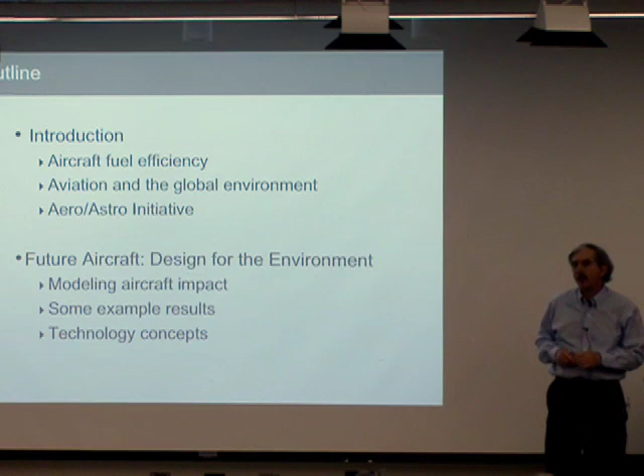That's a high-level overview. Then I want to talk a little bit about some of the technical work that's going on, discussing future aircraft and the possibilities for the next 20, 30, 50 years in terms of designing airplanes for minimum environmental impact, which requires modeling that impact, looking at what we get when we do that, and then talking about some of the new technology concepts that are particularly promising.

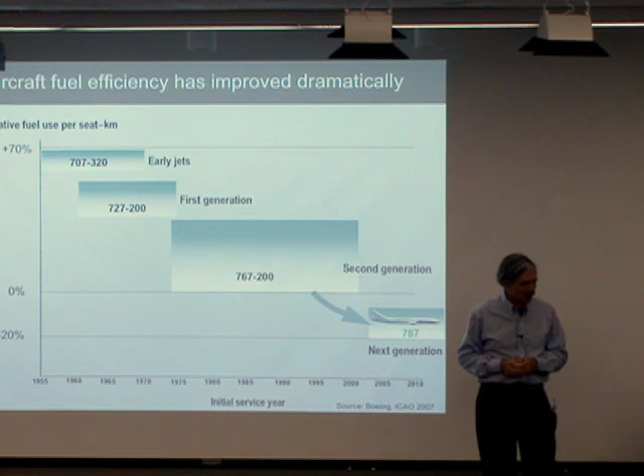This is a plot that the air transportation industry likes to show dealing with aircraft fuel efficiency. And they like to show this because it's a tremendous success story in many ways. Back in the 1950s, the first jets here used a great deal of fuel. This is a plot versus year, actually initial service year, of the relative fuel use per seat kilometer, per number of seats times the distance flown. So it's like miles per gallon divided by passengers, right?

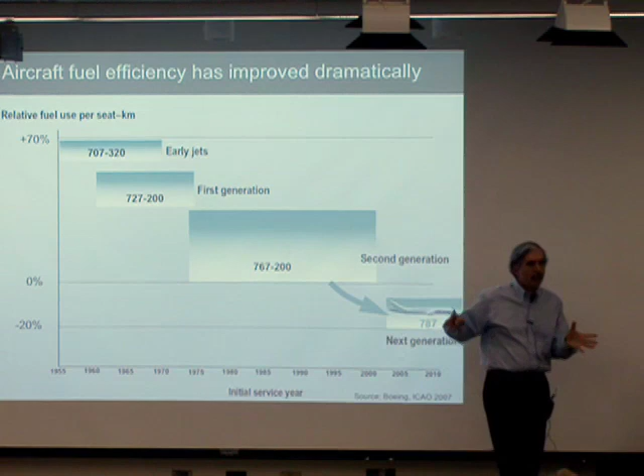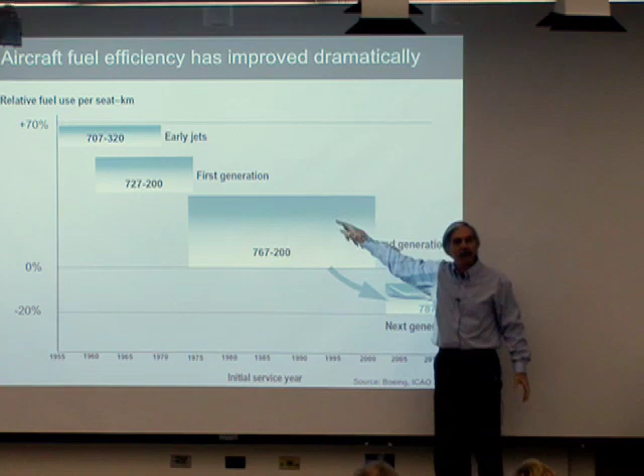But current airplanes use something on the order of 70% less fuel than the very first jets. It's a tremendous advance. I have to say this is partly because the first jets were so bad. And if you actually compare these two, it's still 50, 60%. So it's still really, honestly, a real success story in terms of the efficiency of aircraft.

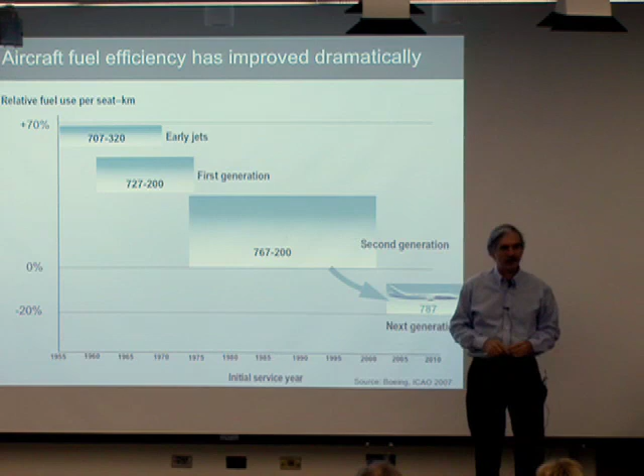The next generation of airplanes, 787, A350, et cetera, look to save another 20% or so over today's fleet. And one of the troubles with this is that people cite improvements in efficiency of somewhere between 1% and 2% per year. Clearly, if we've gone 50% or more over the first 50 years, we're not going to do another 50% in engine efficiency over the next 50 years. Can't do more than 100% efficient on engine technology. So what that means is that it gets harder and harder to make improvements, and this is one thing we're going to be talking about.

We're going to be talking about commercial air transportation, not private airplanes or personal air vehicles, because commercial air transportation has the biggest effect on the environment. So that's a great story.

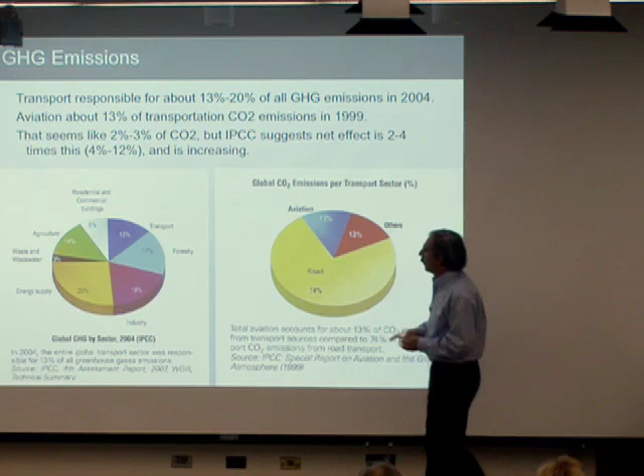But transportation's contribution to greenhouse gases here in 2004 is about 13% of the total. This is human-generated carbon emissions. Actually, this is greenhouse gases. This is CO2 emissions. Aviation is about 13% of that. Okay, so it sounds like 2 to 3% of carbon emissions are associated with air transportation. However, it's a more complicated story than that. And as you'll see, the impact of aviation is actually dramatically larger than that, and in the future, dramatically larger yet.

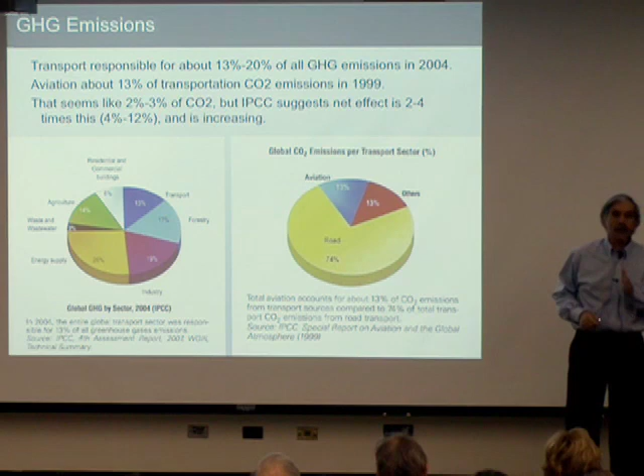What's going on is that the engines are burning kerosene, conventional petroleum-based fuels. In fact, the transportation sector uses by far the most petroleum fuels of any sector in the energy consumption. But airplanes burn kerosene-like fuels and emit carbon dioxide, just like everything else that burns hydrocarbon fuels.

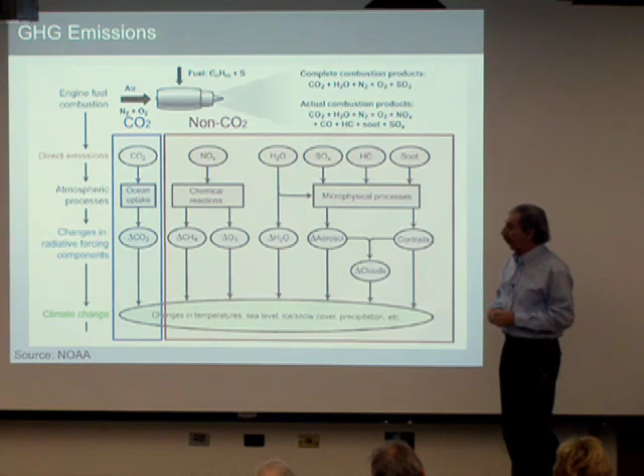Interestingly enough, because it's soaking in oxygen from the atmosphere, for every kilogram of fuel you burn on an airplane, you put in 3 kilograms of carbon dioxide. This is true of all kinds of hydrocarbon combustion systems, right? So you think about that, that 29 gallons, which is something like 30 times 6, 200 some pounds of fuel that you burned on that one very efficient trip across the country, still creates 3 times that. We're starting to get a good fraction of a ton in carbon dioxide.

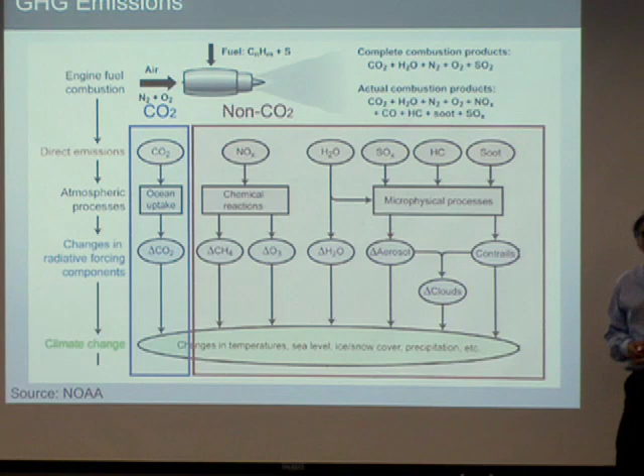One of the troubles is that in addition to carbon dioxide emissions here, airplanes, like many other things that burn hydrocarbons, produce nitrogen oxides, water vapor, sulfur oxides, unburned hydrocarbons, soot, and things that you wouldn't think are problems, like it's just producing water vapor, turn out to be problems when you deposit them at 40,000 feet. And so we'll look at that a little bit. But we have to look then at both the carbon emissions as well as the non-carbon emissions and its net effect on the environment.

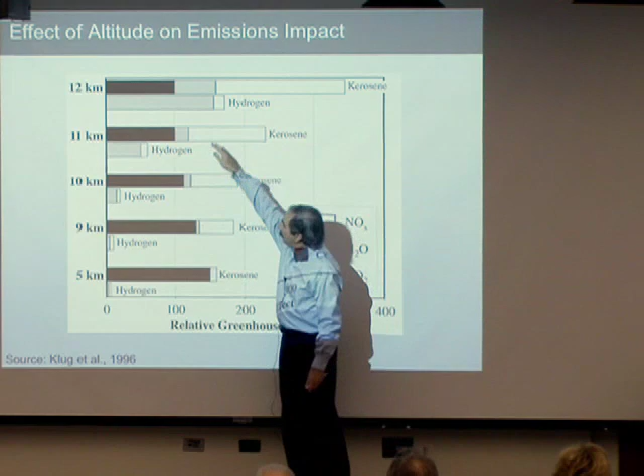One of the reasons that it's not just a story of CO2 is indeed that there are these other species, but also that the altitude effect is quite important. This is a plot from a study of hydrogen-powered airplanes. And what you see here is the relative climate effect for NOx, water vapor, and carbon dioxide at different altitudes, ranging from 5 kilometers up to 12 kilometers. Airplanes are operating usually in this upper region.

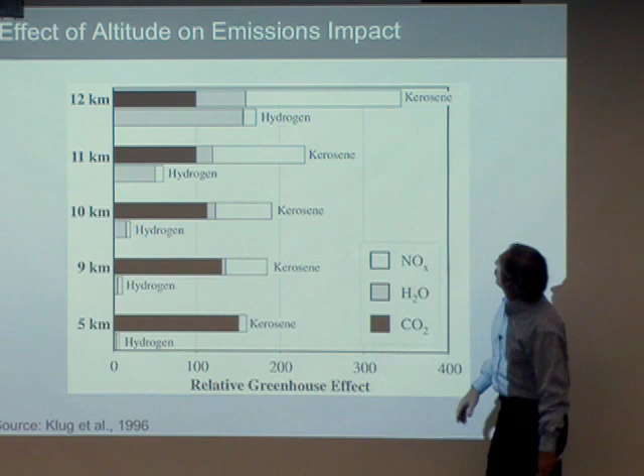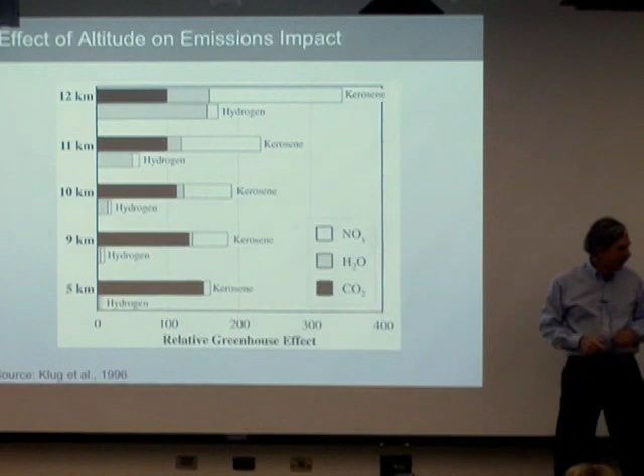What you see is that at low altitudes, the effect of hydrogen is very small if we were burning hydrogen. But at 12 kilometers, in fact, even hydrogen burning has a similar impact to burning kerosene at low altitudes. Kerosene here is substantially greater than hydrogen, but the contribution of different species to climate change really does depend a great deal on altitude. So that makes the analysis of this a little bit difficult.

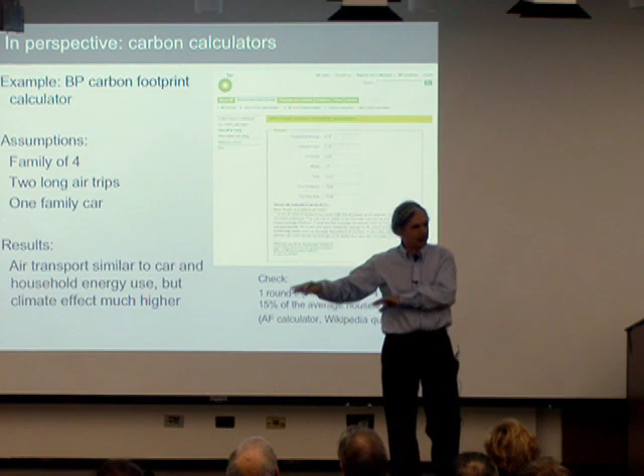What all this means, you could go online. This is a carbon footprint calculator from BP. Air France has another one of these. Most of the airlines have them now so that you can go and figure out just how much your flight is going to contribute in carbon dioxide, and you can then pay a company to offset these or just feel bad or something.

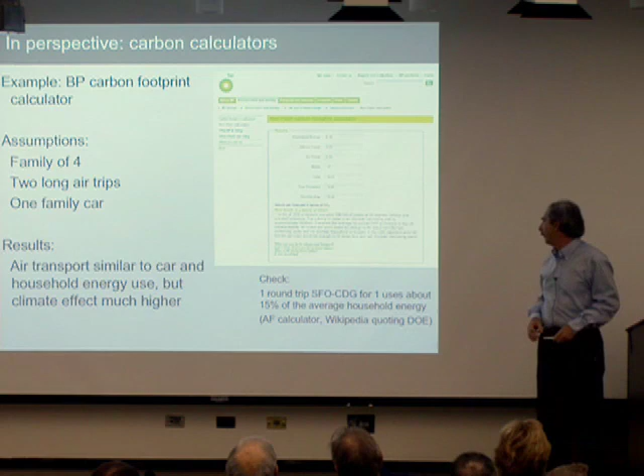But here's what this means. If you assume that you have a family of 4, take 2 long-distance trips a year, have 1 family car, you find that the amount of carbon emissions associated with air transport is similar to the entire year's household energy use, similar to all of the use of the car. The climate effect can be quite a bit higher. So another number here, fly to Paris from San Francisco for 1, that's about 15% of the average household energy use, 1 trip. So it is one thing that we do that has a big effect on greenhouse gas production and climate change.

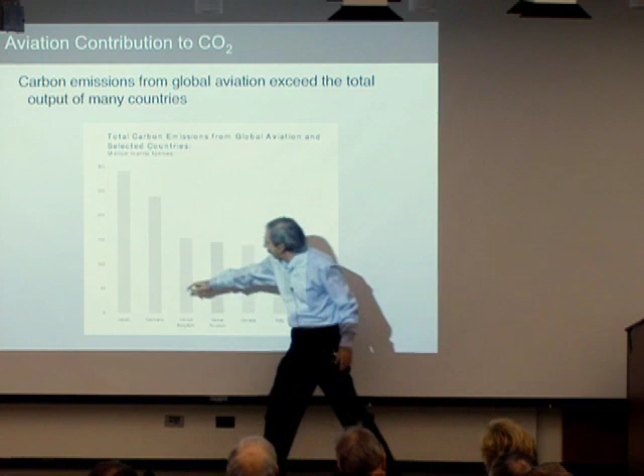What this means, by the way, this is a plot of the carbon emissions from global aviation and several countries. So aviation produces about the same amount of carbon here as the entire UK or Canada, for example. Here's Japan, Germany, right? So although we're talking about 2% contribution, it's a significant thing, and we have to think about it, especially if we're in the business of building airplanes.

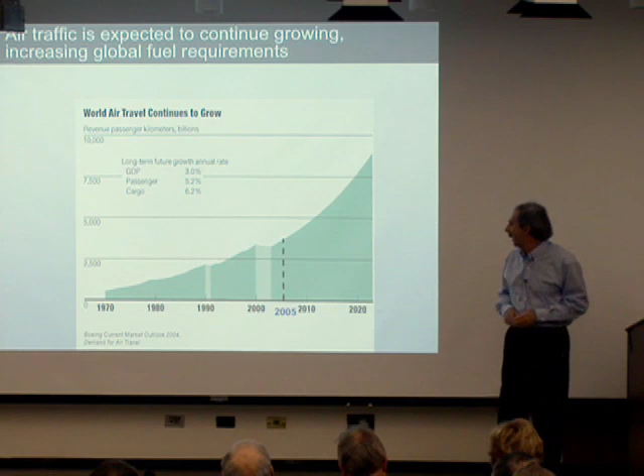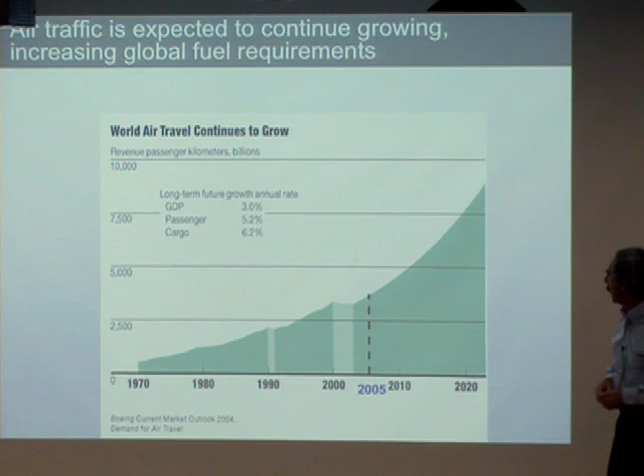It's actually far worse than that, and the reason it's far worse than that is because air travel is growing tremendously. It has for many, many years, even with dips associated with 2001 events. We are now actually still on this track. No one, of course, can predict this, and especially with global economy changes, we don't know this will happen, but historically, there's been a very significant, something on the order of 5 to 6% growth. In Asia, it's more than that. And so if you extrapolate, it doesn't take too long until you're talking about doubling and tripling the number of those passenger kilometers that are flown every year.

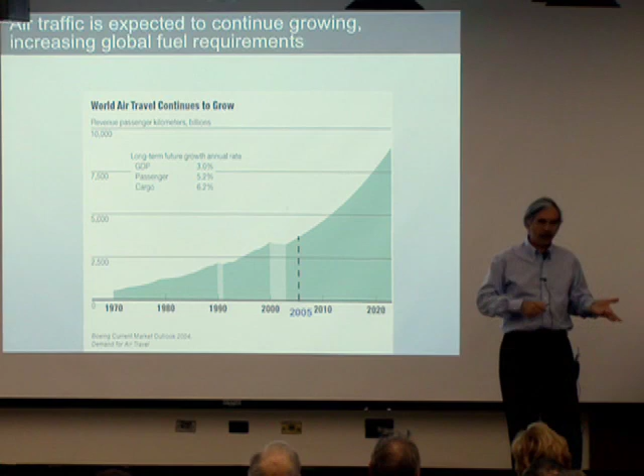And that means the total contribution is going up no matter what you do, or you have to do a lot to make it not go up a lot. So this has led to people being very concerned with the impact of global aviation. This is a thing from CNN that, among other things, says, aviation, the fastest growing source of greenhouse gases.

That's surely not true, and doesn't really mean much, but with radiative forcing factored in, aviation represents 12 to 13% of emissions. Well, that's also a lot of things that are a little bit tricky in looking at statistics, but the point here is that people are becoming aware of the impact of aviation on the environment and becoming concerned

about it. Yes? By emissions, are they referring to total greenhouse gas warming effect? Who knows what they are referring to. We'll see some numbers here in a minute so you can get an idea of what we really think that is.

So the problem here is that if you really anticipate a threefold increase in global air travel over the next few decades, we're going to have many problems. And one of them is certainly going to be the environmental impact. There are also going to be issues with safety and capacity and many other things. And so we are very concerned about all of these things and being able to maintain the ability to travel as we do now.

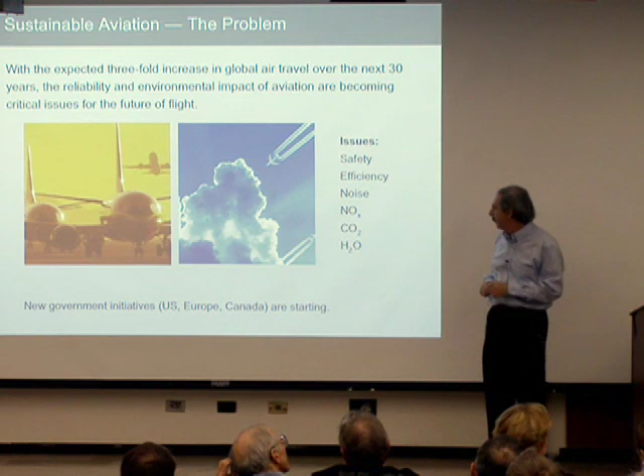This has led to a number of new initiatives at the government level. Both US, the FAA is doing things, NASA is doing things. In Europe, there's a Clean Skies initiative, which is putting in something on the order of $2 billion over the next 7 years to address exactly these issues. So these are just starting up,

and one of the initiatives that's starting up is some work in the Aeroastro department with the goal of developing technologies that will allow us to accommodate this growth and allow the tripling of capacity without an enormous increase in environmental impact. So what we'd like to do is allow a tripling of capacity with an actual reduction in environmental impact.

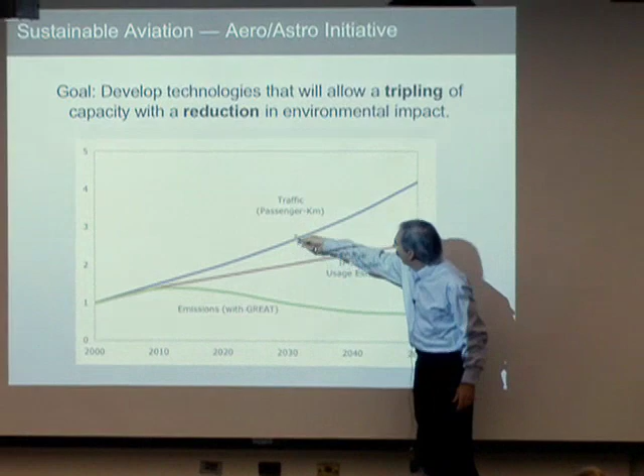So this is a plot of the expected traffic, the fuel usage, assuming a certain amount of improvement in aircraft, and what we'd like to do to have the emissions level off here so that in 2030, 2040, we are not doing any worse than we are now. This is what we mean by sustainable aviation. We'd like to be able to continue adapting to world growth without making a situation where we simply can't sustain that environmentally.

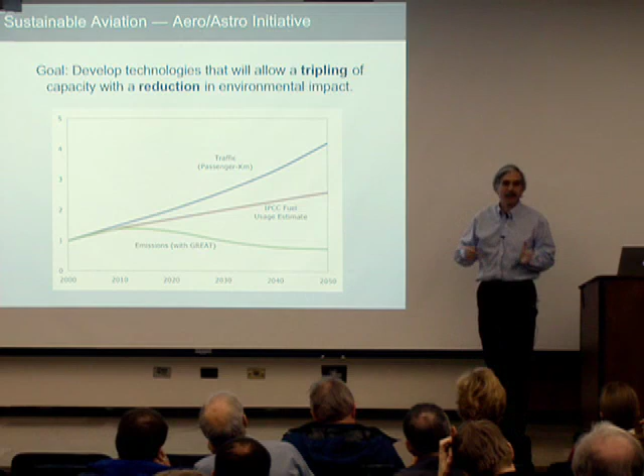This particular initiative involves a variety of research thrusts. One of them looking at new concepts and technologies that can help achieve this, and that's really what I'm going to be talking about today. But in AeroAstro, we also have folks working on airspace systems, how you deal with the complex system of aircraft in the airspace, and also monitoring the system at a larger scale.

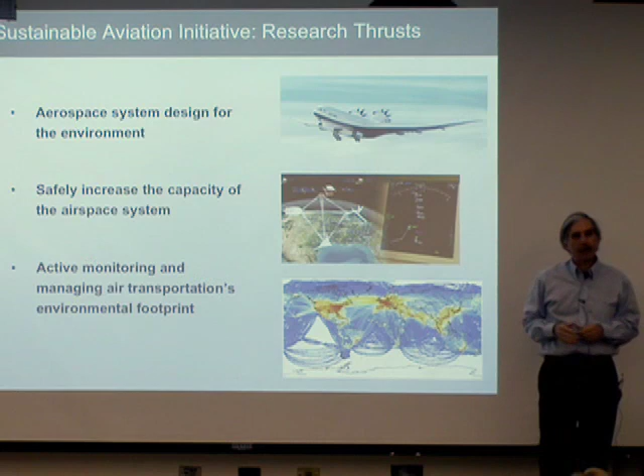So one of the research thrusts that I won't say much about has to do with actively monitoring and managing the system, and in particular the environmental footprint, so that you can control the operations to reduce the impact. One example of this might be real-time monitoring of winds and conditions around an airport to try to reduce the noise footprint. Another might be to actively monitor the conditions in the atmosphere that cause contrails.

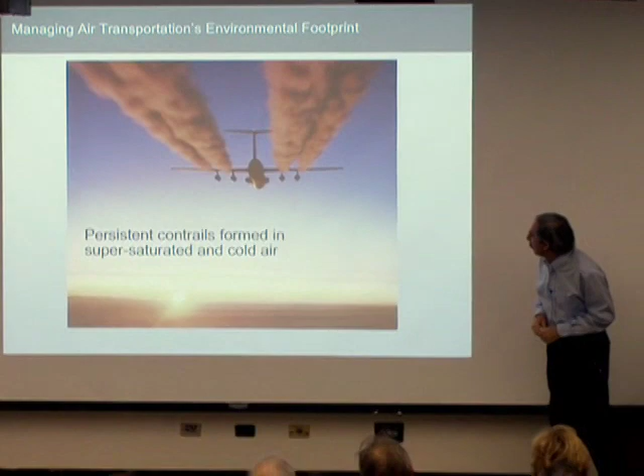By actively monitoring, I mean using satellites and a variety of inputs so that you can tell an airplane in real time, look, there's an area that's going to cause contrail formation, replan your route, change altitude, do something, because contrails, as we'll see, have the potential of causing climate change as well as along with the CO2 emissions.

And here you see contrails formed in the supersaturated air. But the conditions for contrail formation are actually pretty specific. That is, you change the altitude by a few thousand feet and you won't produce contrails. So knowing that that's going on, we can make a big difference.

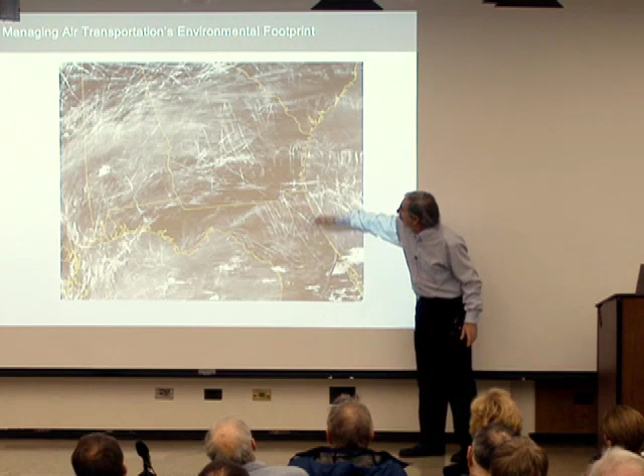And here you see some contrails. This is Florida, right? So this is southeastern US. A fair fraction of that area is covered by contrails, and this has an effect on the balance of radiation from the sun and emissions from the Earth.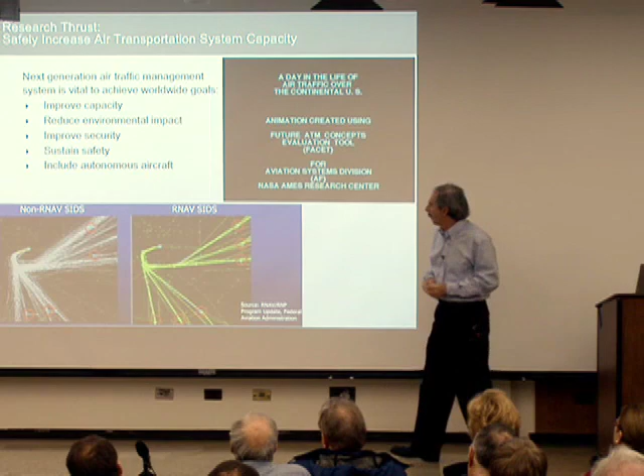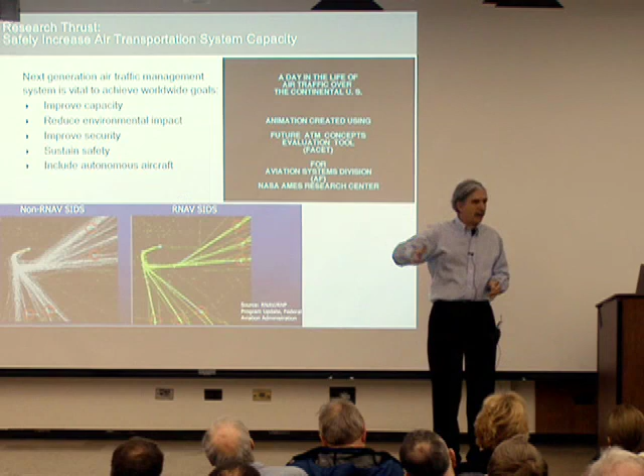We would also like to be able to use things such as precision navigation to reduce the environmental footprint. This is a plot of the tracks of airplanes departing from Atlanta. And this is a plot of what could be done, and this is an actual demonstration, what could be done using precision navigation systems and GPS to not just say, okay, turn right now, but rather to follow a path that's pre-planned, a four-dimensional path.

And you can see that the tracks of the airplanes are much more restrictive, and therefore the noise impact on the community is much reduced.

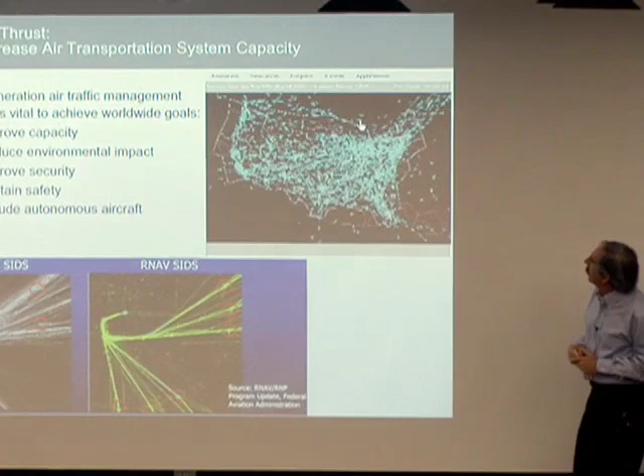We'd like to use these technologies to improve capacity, reduce environmental impact, and increase safety. To get a feeling for really what we're talking about here, here is a movie of actual positions of airplanes over the US in a day. We're looking now at 1,700 airplanes.

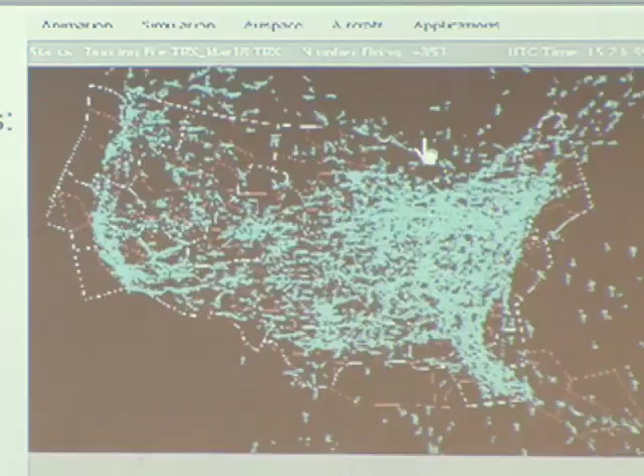Now it's the middle of the night, so things get pretty quiet. And then you'll see as the sun starts rising in the east, we start getting more traffic in the east. And then as it moves west, we now have 4,000 airplanes flying. And this is a real challenge to try to manage in any reasonable way. Certainly, there are opportunities there to do more than we're doing now.

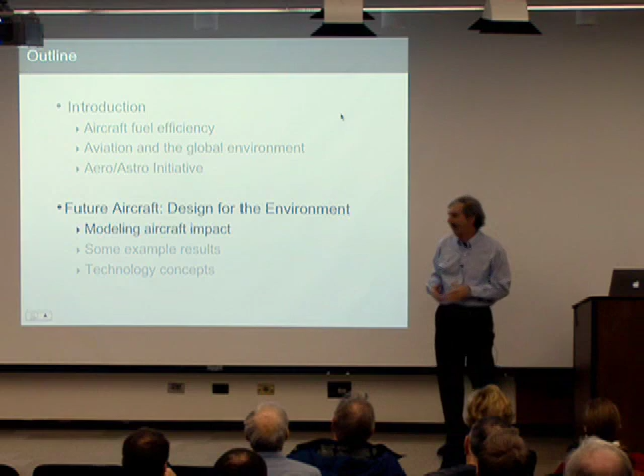So let me say a little bit about what we envision doing in the future, looking at aircraft technologies where we design the airplanes not to just minimize cost, but to look at their impact on the environment. I'm going to talk about three things: how we model that impact on the environment, show you some results, and talk about some new ideas.

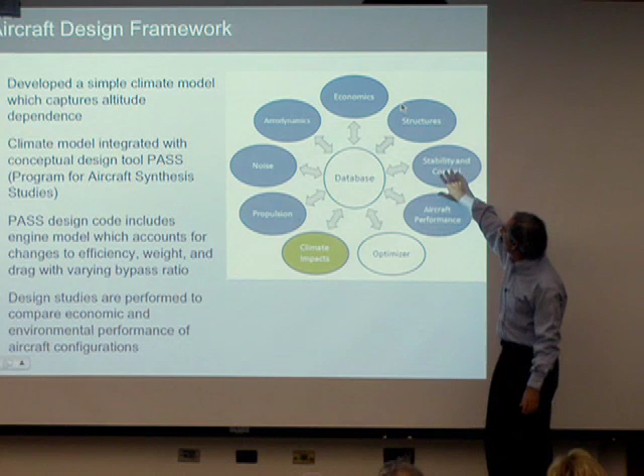So at Stanford, we developed methods for designing airplanes and evaluating them that include not only their performance and stability and control, structures models, economic models, noise models, propulsion, all that communicate with the database. This is a complex multidisciplinary design problem. We use numerical optimization to vary all kinds of parameters about how the airplanes fly or what they look like, and then come up with, in some sense, the best design subject to whatever constraints that we've imposed.

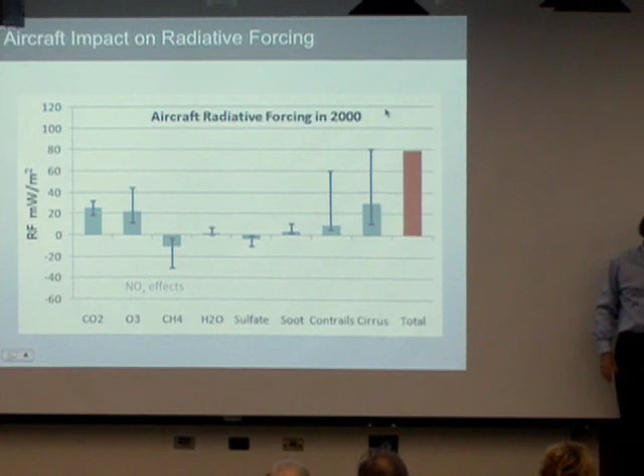One of the things that we've done with this analysis tool that we also use in classes here is to develop improved models for climate impact and to include that in the entire aircraft design process, right from the very beginning. That is not so easy because there's a lot going on. This is a simplified version of a famous chart from the IPCC, the Intergovernmental Panel on Climate Change, that looked at the aviation impacts on the environment.

And what you're seeing here is the so-called radiative forcing. It's the imbalance in energy flux or power flux between sunlight and reflected and other fluxes. And what we see here is the delta due to aviation actually over the history of aviation. And so what you see here is CO2 producing a net radiative forcing that's shown by the height of this bar, with this being an uncertainty in the estimate.

Here you see ozone and methane, which are affected by the presence of NOx, nitrogen oxides. Nitrogen oxides tend to deplete methane, but create ozone. And the extent to which they do this depends on lots of things. Water vapor, sulfates, soot, contrails, cirrus clouds. What you notice here in the contrails and cirrus clouds is that the effect is not trivial, but the uncertainty is huge. And so we have to think about what that means. So here's the total radiative forcing.

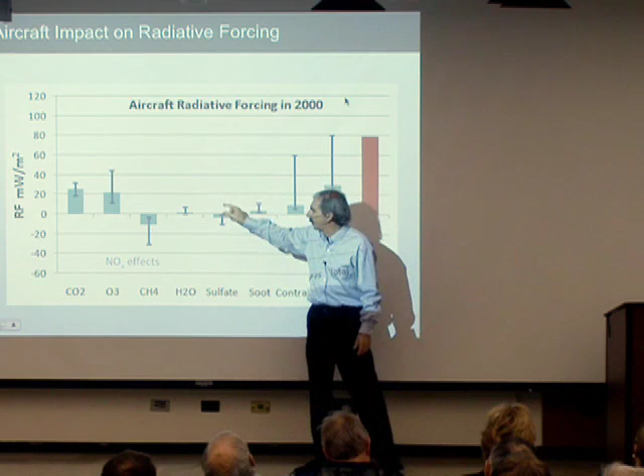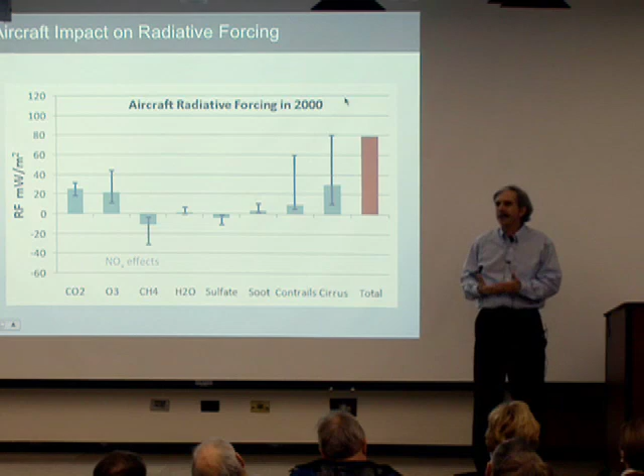So if we're going to develop a climate model for airplanes, we have to look at the effect of many of these things. We're going to ignore a few of these small ones, but many of these things whose impact is actually pretty hard to figure out, because radiative forcing is a pretty bad measure of climate impact. Just as an example, CO2 can stay around in the atmosphere for 50 to 100 years, whereas contrails disappear in a day or less. And so to properly include these in some kind of model is a challenge.

So radiative forcing has some difficulties. The effects differ due to different time scales. Different sources produce different surface temperature changes. It's not a great model. We're going to use something else that's a little more sophisticated that is going to be used just for our purposes. Let me show you what that is.

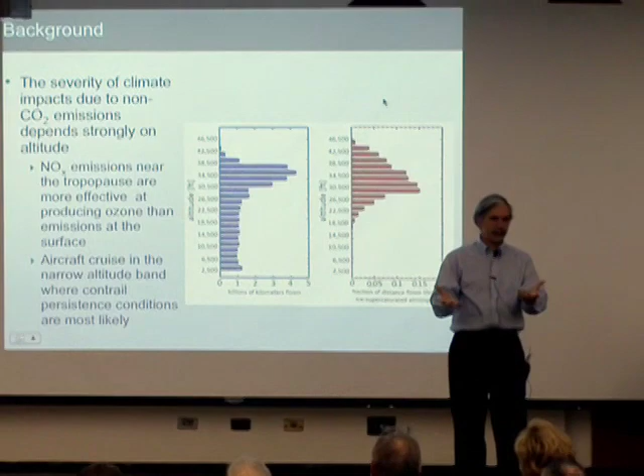We are going to use some kind of estimate of temperature change over a 100-year period due to the presence of these emissions deposited at different altitudes that you see here. It's particularly challenging because the non-CO2 emissions are very altitude dependent. This is the effect of NOx emissions and CO2 emissions, NOx emissions and contrails, which vary quite a bit with altitude. We are not trying to estimate exactly how many degrees change we expect in 100 years due to this, fortunately. We are not, like some other people, challenged with the task of trying to make policy based on this.

So we really only are going to be using this to compare different airplanes. And so we don't really care what the exact numbers are, but we want the effects of the different species and the different airplane parameters to be captured properly.

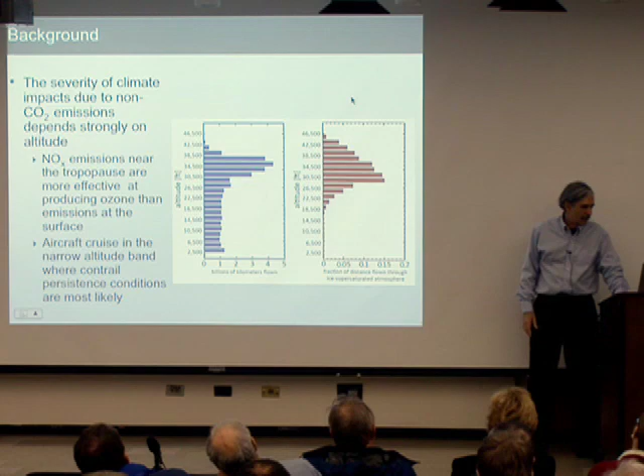So we're looking at contrail formation, NOx effects on ozone and methane. And we take the emissions, we estimate the radiative forcing. In this step, we are able to account for the time variation of short-lived emissions. These are based on climate models from real atmospheric scientists, not airplane designers. And we've developed a simple version that measures this change in temperature associated with a 100-year operation of this system over the time.

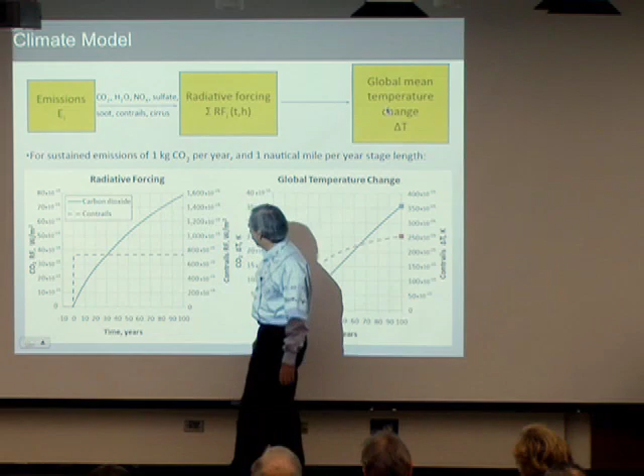This just shows some example results of, this is the CO2 radiative forcing. This is the radiative forcing due to contrails, and this is the time dependence of both of these. Actually, this is carbon dioxide in blue, contrails in the dotted line, and here we're looking at radiative forcing versus the new metric, a global temperature change.

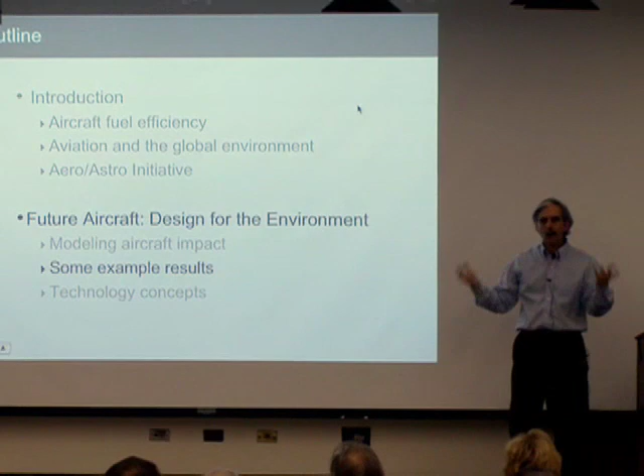And you could see their time dependence is quite different, and therefore you end up with different conclusions. So let's take a look at what some of those conclusions might be. We'll take a look at applying this model, doing optimization for future aircraft designs, and seeing what we get.

So here's the problem. We're going to design a 162-passenger airplane. This is roughly in the class of airplanes that people are interested in right now, which is going to replace the vast majority of airplanes flying. It's going to fly 3,000 miles, and it's going to look a little bit like a narrow-body airplane, like a 757 or a 737.

Not going to be some big, yeah. Jeff doesn't like flying in 757s. Neither do I. So we have something for you in just a minute.

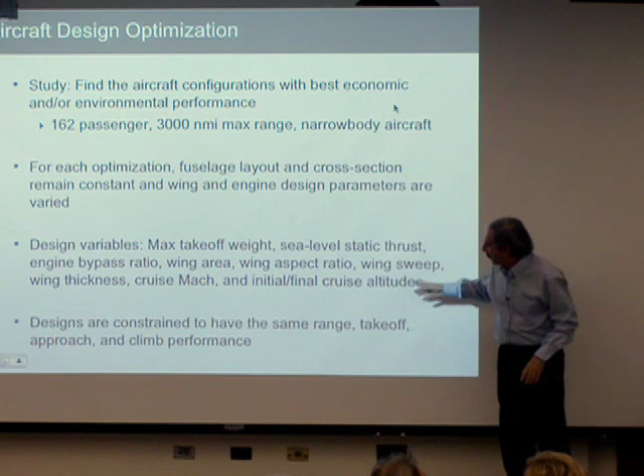We're going to fix the fuselage. We're just going to say we're going to keep the passengers just as uncomfortable as they are today, but we're going to reduce their guilt, so their environmental impact. We're going to change lots of things and constrain the airplane. So we have 10 design variables, like the size of the wing and what the span of the wing is, how fast the airplane flies and at what altitude, how big the engines are, this sort of thing.

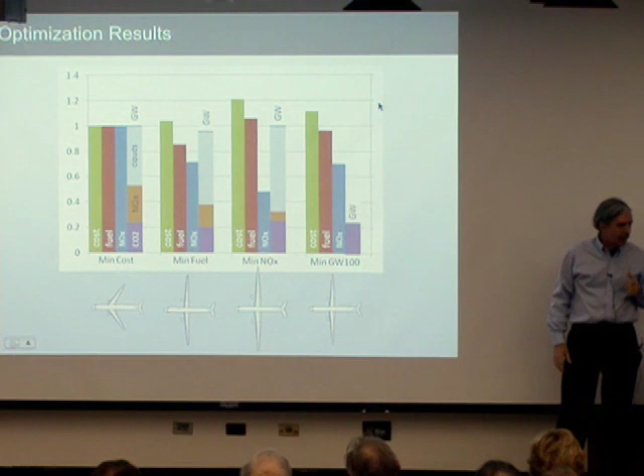We're going to make sure all these airplanes take off and land on the same runways, are stable, and fly the same distance. We are going to look at the difference between these airplanes if we try to minimize cost, minimize fuel burn, minimize NOx emissions, or minimize the complete 100-year global warming estimate. And so here are just some examples of what you get for these cases.

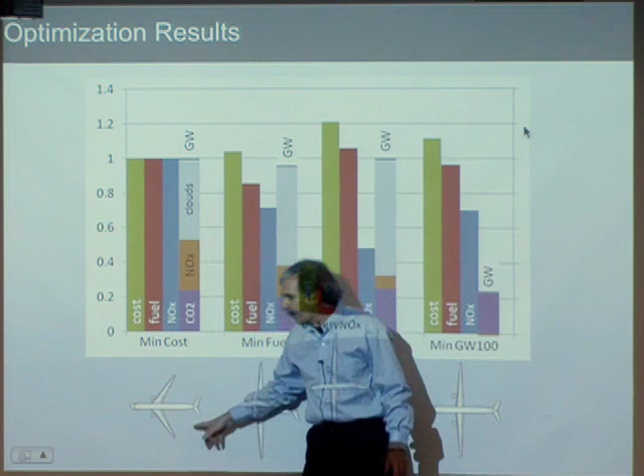This is a scaled measure of cost, fuel burn, NOx, and the contribution to global warming for an airplane that's designed for a minimum cost. Okay? So all of them are 1 for this baseline airplane designed for a minimum cost, and in fact would meet the environmental regulations of today. If we minimize fuel burn, we can actually do quite a bit better in reducing the amount of fuel that's used and have some impact on global warming here.

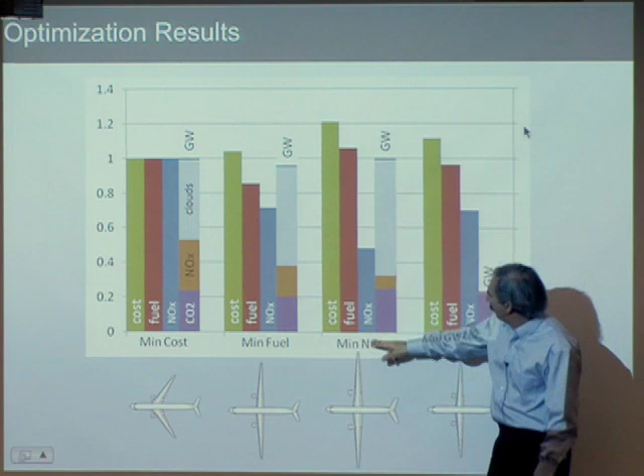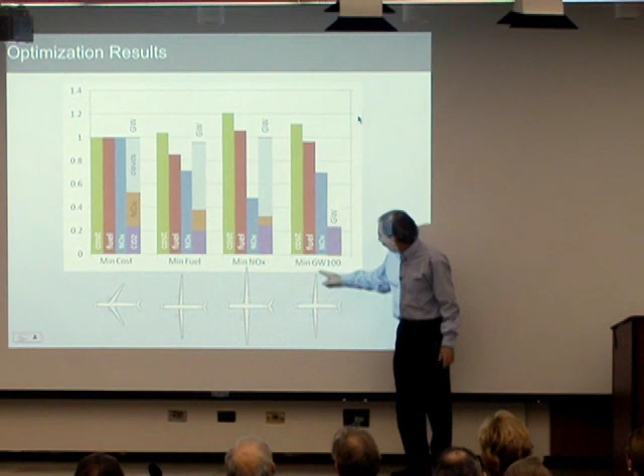If we minimize NOx, we can have a much bigger effect on NOx. And if we actually look at minimizing this climate impact, we have actually a very big effect here on that metric. We don't really want to look at any of these airplanes because an airplane designed to minimize climate impact with no thought for cost is going to be a pretty silly design. It's not practical, and in fact, you can see that by looking at what happens to this airplane. This airplane ends up flying at a little more than half the speed of existing airplanes.

That's a big problem. And so what we really want to do is to look at all of these metrics at the same time. And this is called multi-objective optimization, and there are new techniques for being able to do that. This is the minimum cost design, some specs on it. It flies at 0.85 Mach number, 85% of the speed of sound at 39,000 feet.

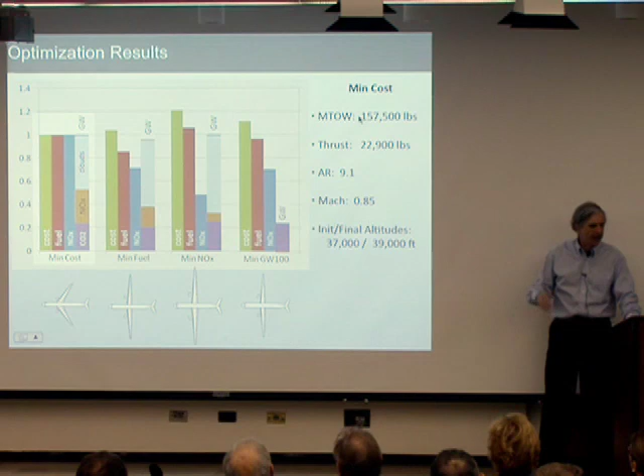The minimum fuel airplane flies at Mach 0.61, about the same altitude. Minimum NOx airplane is down to Mach 0.5, which is a big problem. And down to 0.45, this is pretty much half the speed of conventional airplanes. So we're not interested in that. Here's a multi-objective study. So here we're looking at 2 objectives.

On the vertical axis, the climate impact, again, all referenced to our baseline airplane designed for minimum cost. And here's the cost. Okay? And so here's our minimum cost. This is our minimum climate change airplane. And you can see it costs 12% more.

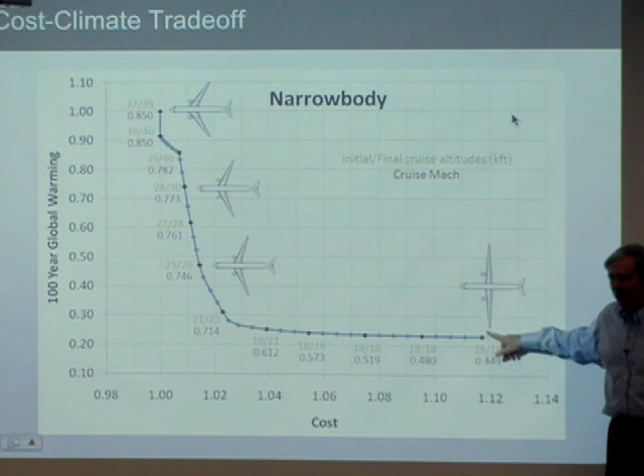Although it saves lots of fuel, you have to pay the pilots more. Your total utilization of the airplane over the year is less. All of these things are included in the cost modeling. And so this is not an interesting airplane to look at. But the curve is very interesting because it says that you can actually make some difference without changing the operation of the airplane much. And then you can have an enormous impact on climate change by changing these airplanes before you start really slowing down.

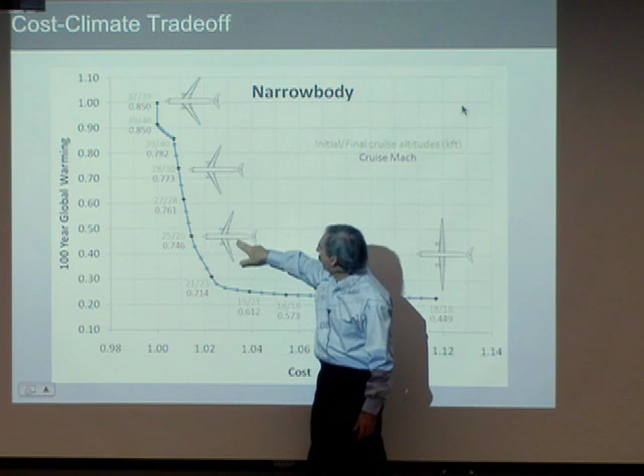So in red is the Mach number, the flight Mach number. This says that by slowing down from Mach 0.85, which would be typical of a 777 or 767 maybe, slowing down to 0.75 or 0.71, you get most of the effect on the environment by doing that. And the cost change here is on the order of 1 to 2%. Lots of us would pay 1 or 2% extra to reduce climate impact by 50, 70%, right? But it's a new airplane. By the way, the old 737s actually fly at this speed anyway.

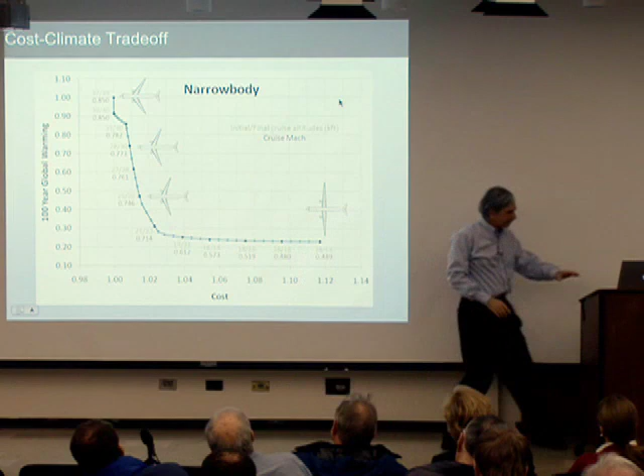Okay, so one of the problems with this is that some of those big changes are associated with those species that have big uncertainties. So that included the effects of contrails and cirrus clouds, which frankly, we don't know very well. So what we'd like to do is look at the effect of uncertainty on those results, right? And what we did, and when I say we, I actually mean Emily Schwartz, who's a PhD student in the Aeroastro department, looked at using 2/3 confidence intervals from this IPCC estimate and some other input to try to look at all those results that I showed with different models.

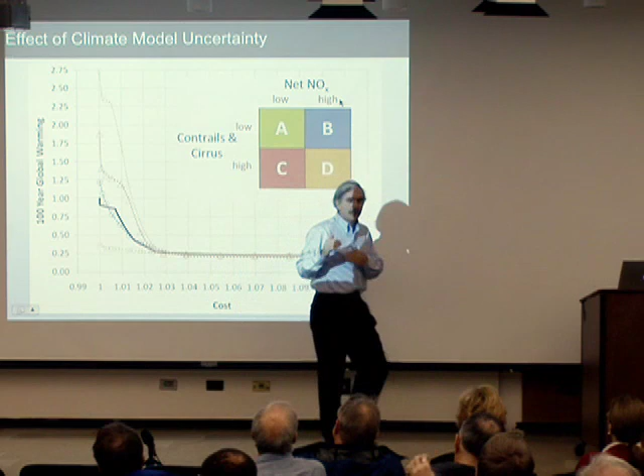On the other hand, these are all the optimum airplanes, remember, all the way out here to the lowest climate impact case. And what we see is that regardless of our estimates, maybe we are high or low, we can be down here to this level, which is something on the order of 25 to 30% of our mean estimate right now, regardless of those uncertainties. The total change may not be big if we were wrong about cirrus clouds and contrails, but it still might be a really good design. And again, at 2 to 3% cost increment.

So, summarizing some of the results of that optimization study, only about 1/3 to 1/2, depending again on how important you think cirrus clouds are, of climate impact is associated with CO2. And that's one of the reasons why the 2% versus the 4% versus the 12% depends on what you're using there. We really don't know at this point. Designing an aircraft to have low fuel burn can create small changes in the climate change estimate if you operate them at the same altitudes and speeds we're talking about now. But if you allow them to slow down a little bit and come down some in altitude, you can have much larger effects.

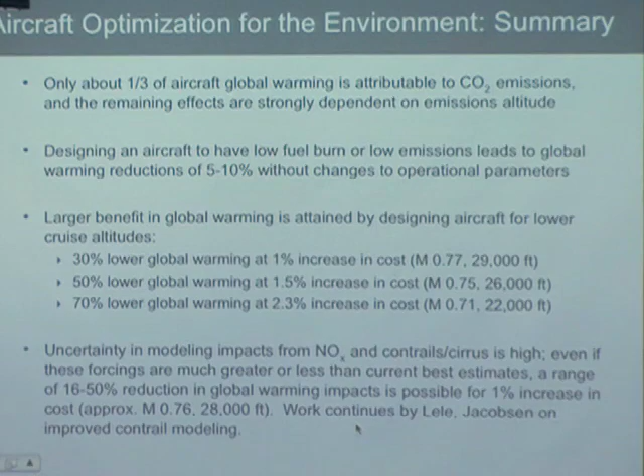Uncertainty is important, and this is a big problem right now with the model. We've shown that it doesn't necessarily affect the conclusions about what you would do. Nonetheless, work is continuing by many people, including Professor Lele and Mark Jacobson here at Stanford, on improving contrail modeling and its effects. So the last thing I wanted to talk about were some new ideas. If you weren't going to just design conventional airplanes but insert new technology, what could you do with all of this?

First thing you could do is change the fuel. And there's a lot of interest and experimenting with biofuels and alternative fuels of one sort or other for transport operation by commercial carriers, here by Virgin Atlantic. We recently had a flight by Qantas that did the same thing, using different fuels. The Air Force did a demonstration of using gas-to-liquid technology. The Air Force was more interested in assuring that the fuels were there than necessarily reducing environmental impact, but still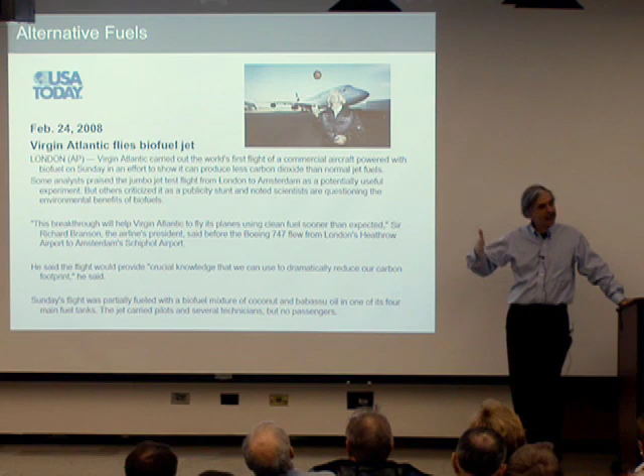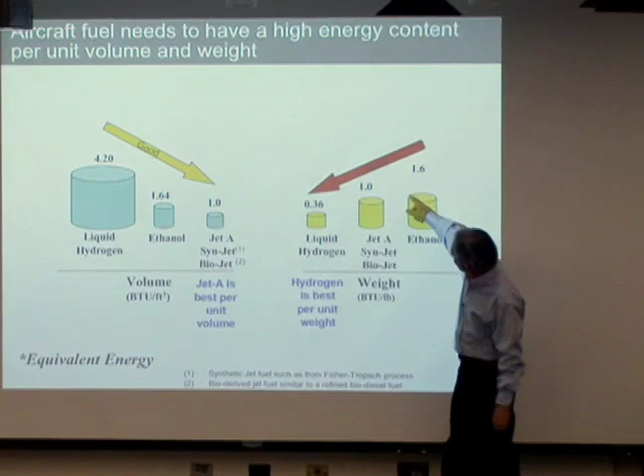an alternative fuels look. One of the problems with alternative fuels for aircraft is that the constraints are different from what we think about when we think of alternative fuels for cars. Ethanol, for example, is a really bad fuel for airplanes, principally because its specific energy, the amount of energy per unit weight, is about 60% worse than what we use right now, Jet A. So your range would be dramatically reduced. The operational issues are tremendous.

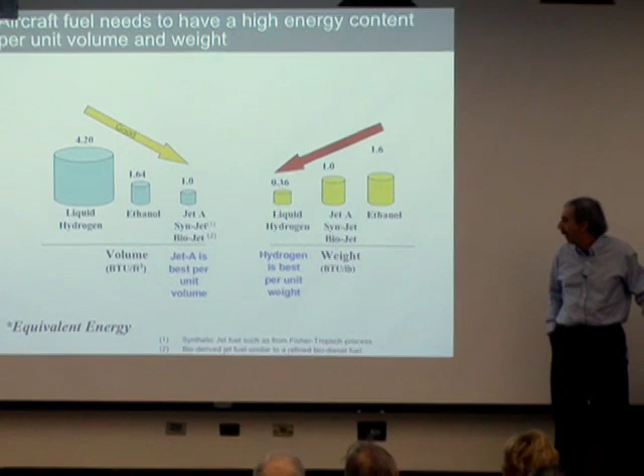Whereas hydrogen, liquid hydrogen, is vastly better than what we use today. Unfortunately, liquid hydrogen has a very large volume, even in liquid form; certainly compressed gas form does too. And the shielding required is high. So we would really have to redesign the airplane tremendously to be able to use hydrogen. And we'd also have to operate the airplane differently because, as you saw in that earlier slide, even hydrogen is not all goodness at high altitudes.

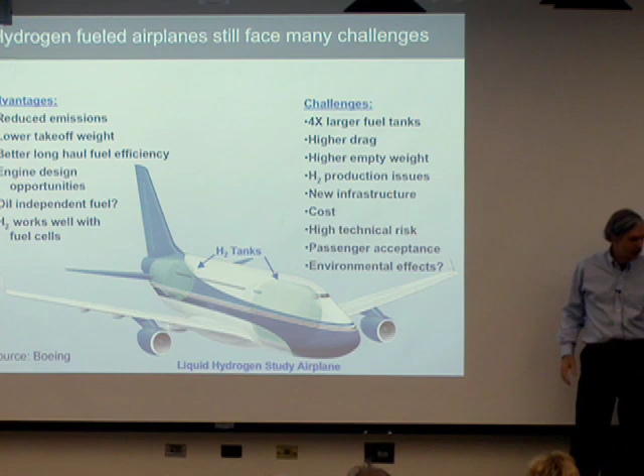Bottom line here is that hydrogen fuel is certainly not an obvious choice for airplanes. Biofuel in some form or other might be interesting, but just using ethanol certainly isn't. One thing that people are looking at are a variety of bio and other jet fuels that are synthesized so that you basically use these as sources of energy but go through a process that produces a synthetic kerosene that has the same kind of specific energy as Jet A. One can also use things like natural gas that has a lower carbon content and produce synthetic Jet A, which again has somewhat lower carbon emissions.

There are other technologies that are really interesting. One of the problems with airplanes that are designed to fly to Sydney is that they have to be designed to fly to Sydney. If they fly to Sydney, they carry a tremendous amount of fuel on board, and they burn a lot of fuel just because they have to carry the fuel. And more than the fact that you have to burn extra fuel to carry the fuel that you'll need for the second half of your flight, the airplane has to be designed to carry that fuel. All the extra weight in the structure and everything else is a penalty, a fuel burn penalty, for every 500-mile flight that airplane takes too.

So people have proposed not designing airplanes to fly 9,000 nautical miles, but designing them to fly 3,000 nautical miles. And while people don't want to take multiple hops, maybe you could refuel them in flight. And in particular, there's a lot of work by the military in developing autonomous aerial refueling. You don't want the pilots paying attention to where the fuel hookup is while they're flying the airplane. But if it were all done autonomously, this represents an interesting possibility. People have done analysis of that and produce estimates of fuel savings for long flights that range from 20, 30, even 40%. So it could be a big impact.

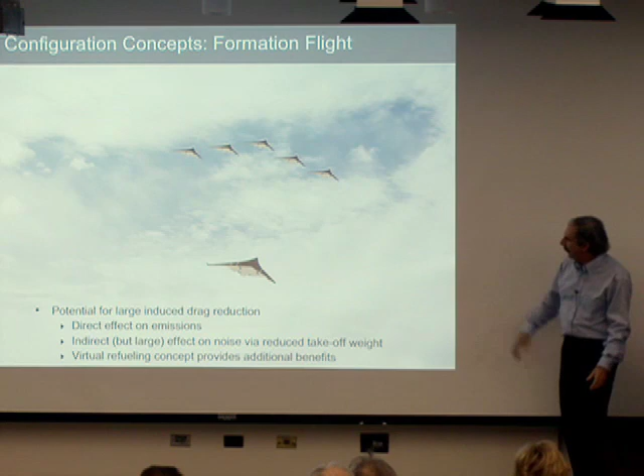Another thing that we're interested in particular is flying airplanes in formation. Now, this is a lot of airplanes, but with just 2 or 3 airplanes in formation you can take 3 200-foot span airplanes and have roughly the aerodynamic efficiency of a 600-foot span airplane, which you couldn't possibly build. And as you saw from all those optimization studies, that's one thing that characterized the lower environmental impact airplanes, bigger span. And yet, you can't park airplanes with 600-foot spans at SFO or anywhere else. So there are some interesting ideas there.

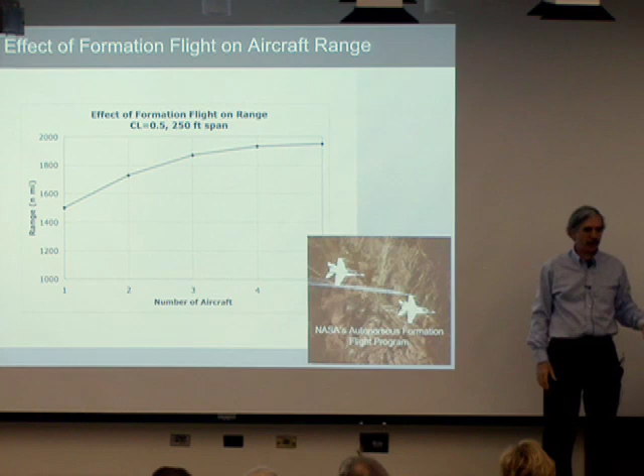NASA has done some work in actually demonstrating this. These are two F-18s flying in formation. This is what we estimate the change in range would be, depending on whether you have 1, 2, 3, or 4 airplanes. It's not 1 or 2%. It's a significant impact. This, again, would be done autonomously, so the pilots wouldn't have to be flying wingtip to wingtip. And in fact, these airplanes could be spaced apart hundreds of spans, a mile or so apart, so you're not flying like the Blue Angels in this case.

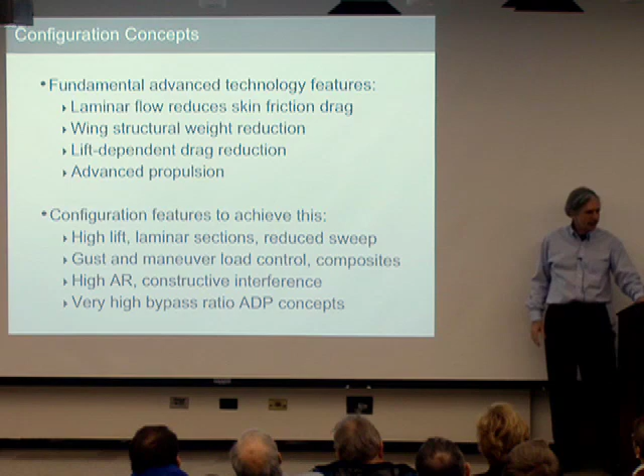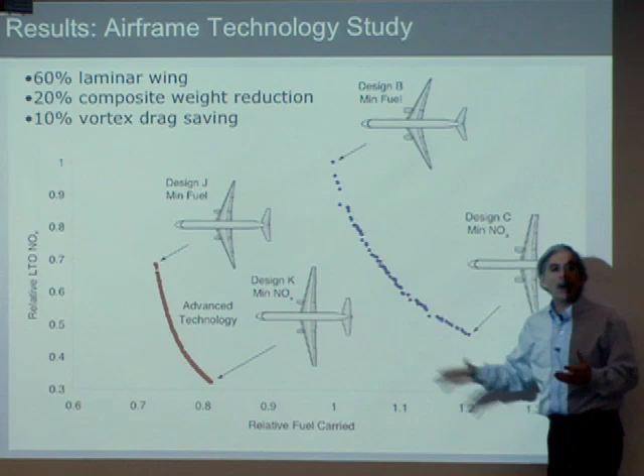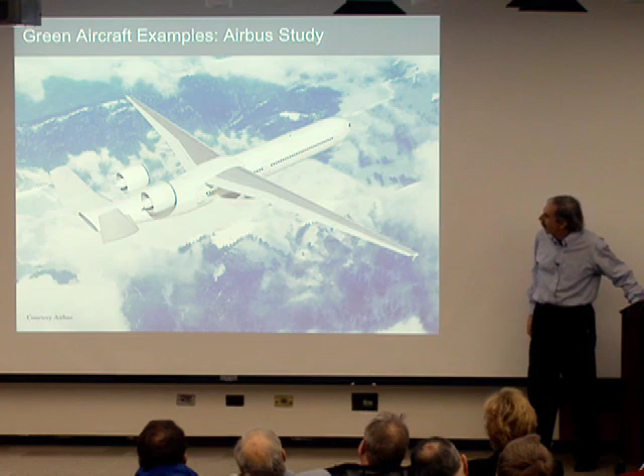So here's an airplane that might, in fact, take advantage of that. This is an Airbus design, unswept wings, so they have slowed down a little bit. It has actually a strange structural technology, in this case with a strut to reduce the wing weight, to enable that larger span. An interesting horizontal tail which shields the people on the ground from engine noise. It has high bypass ratio engines, new engine technology as well.

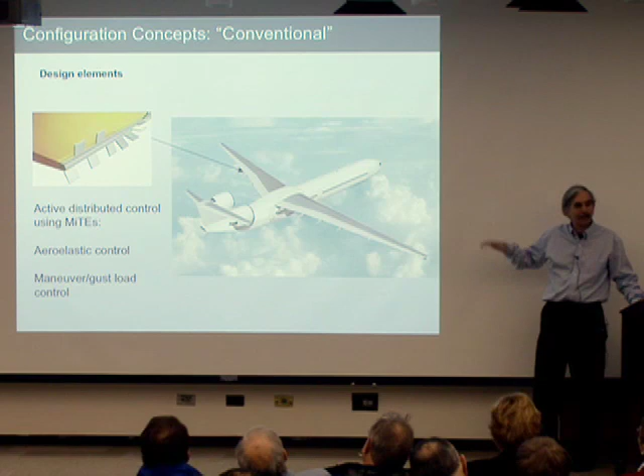We could change the wing somewhat in a number of ways to reduce the drag of the wing. In fact, using some smart technology which senses when gusts come and reduces the loading on the wing to allow you to have a larger span without more wing weight. And this is some study that we did here on active load management for airplanes. We could put the tail in the front, which has some potential advantages. We could change things completely.

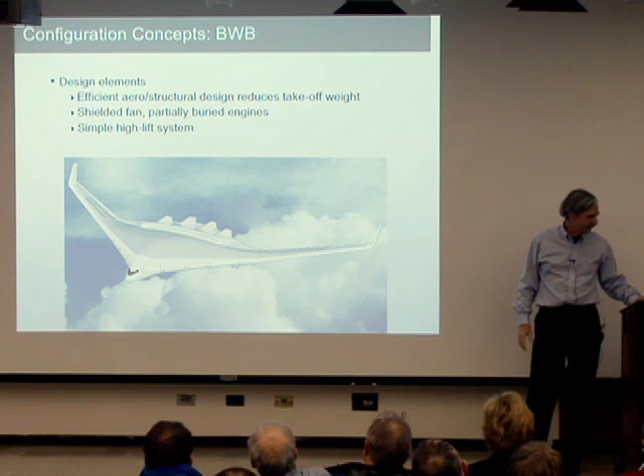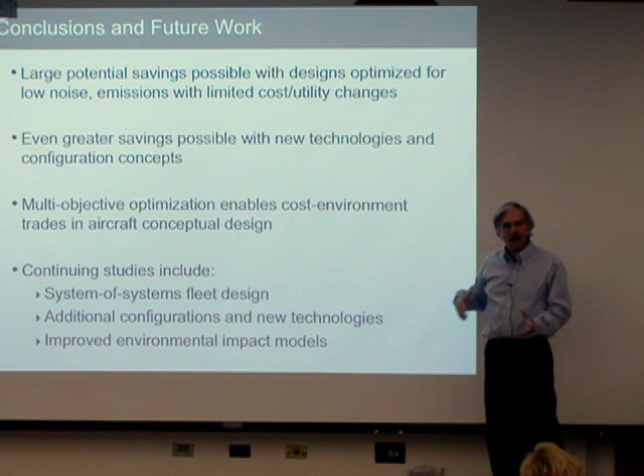Okay, so to wrap up here, there's some large potential savings that are possible with designs that are really tailored for low noise, low emissions, and they require pretty limited cost and utility changes. Greater savings are possible when we start looking at new configurations and new technologies. These kinds of techniques of looking at multi-objective optimization with climate modeling are very important in doing conceptual design of these new ideas. We're continuing study of designing the complete system, that whole group of airplanes rather than just one airplane, looking at new configurations and improving the climate modeling.

So to wrap up, I kept saying we, lots of folks in AeroAstro and elsewhere. Emily Schwartz did a lot of this work. Nick Antoine, a former PhD student now at Airbus, did some of that. Dave Daggett is from Boeing, who's done a lot of interesting work on alternative fuels. We're partnered with folks from MIT, Georgia Tech, and elsewhere looking at these things, and some of this work was particularly done by Karen Willcox at MIT. Support from NASA Langley, Boeing, NSF, and we're doing a lot of cooperative research.